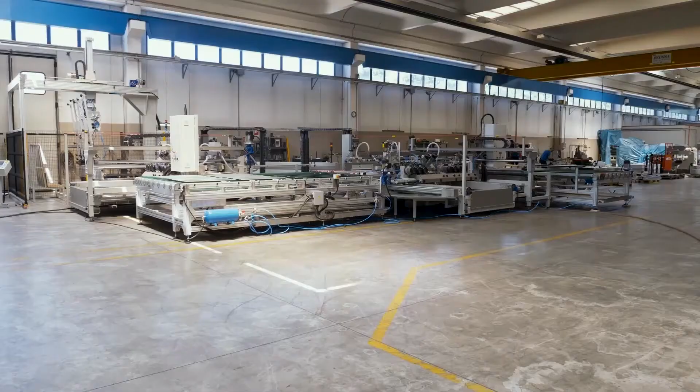Good morning and welcome to everyone. We are pleased to introduce our double edging machine line, model BFP35, for processing flat edge with arrises.

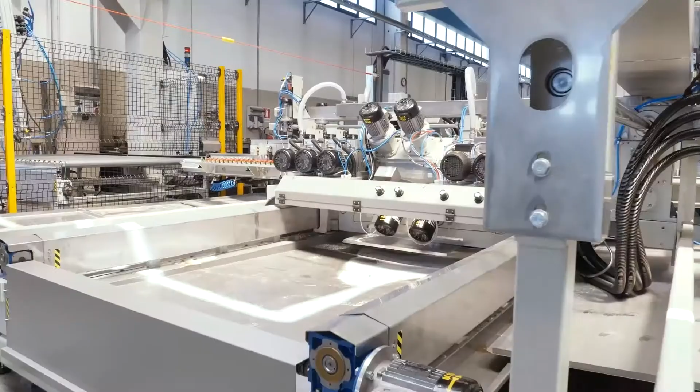It is composed of two double edging machines and two linking transfer tables. Every machine has 11 wheels per side between diamonds and polishing. The BFP35 model allows automatic processing of all four sides of the glass without operator intervention and ensures perfect squaring.

This line includes also an automatic glass loader which works together with the machines. Depending on the necessities, the line can be integrated with a drilling center and/or an automatic unloader.

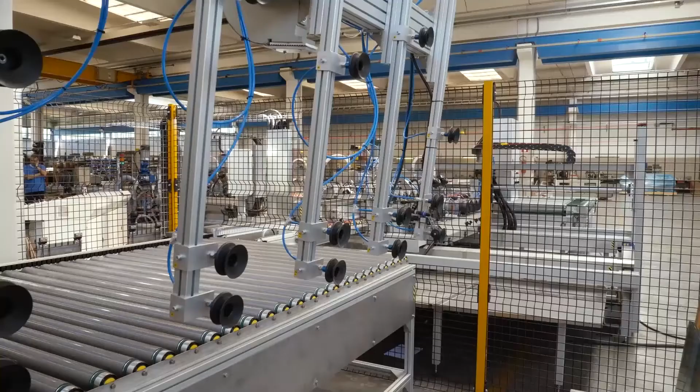A usual productive process starts with positioning the glasses into the loading area. The area near the loader is delimited by protection nets to safeguard the operator. The entrance is prohibited when the machine is working, so if the entrance door of the loader is opened while it is in operation, it is stopped immediately.

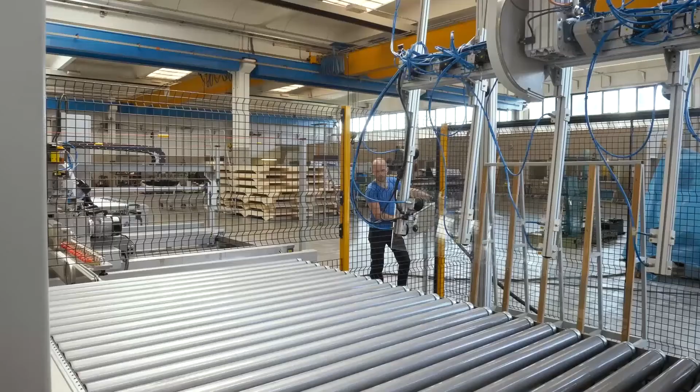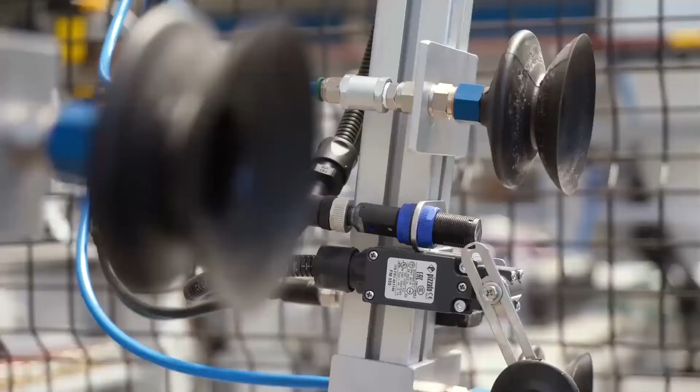Over the cup holder frame there is a scanner which reads the barcode on every glass sheet. The relevant data are taken from both the loader and the first machine. Based on the codes in the database, the loader sets itself automatically, activating only the necessary suckers and calculating the loading timing, while the first machine sets the whole line.

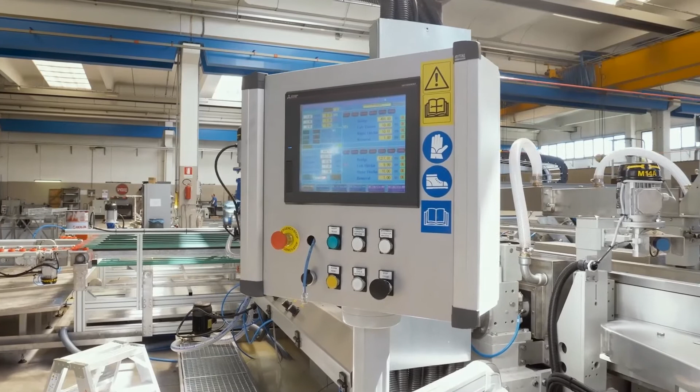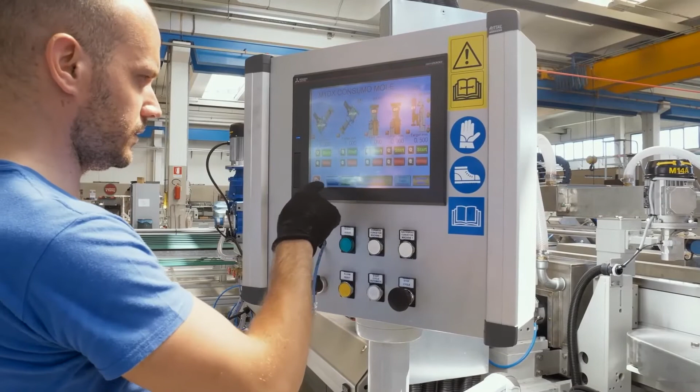The PC of the first machine works as control center for managing all the operations of the line. From the touchscreen it is possible to program and manage diamond wheel presets, even singularly, lubrication, control of the automatisms such as aligning, squaring, glass removal, polishing spindles, visualization of working data, and alarm management.

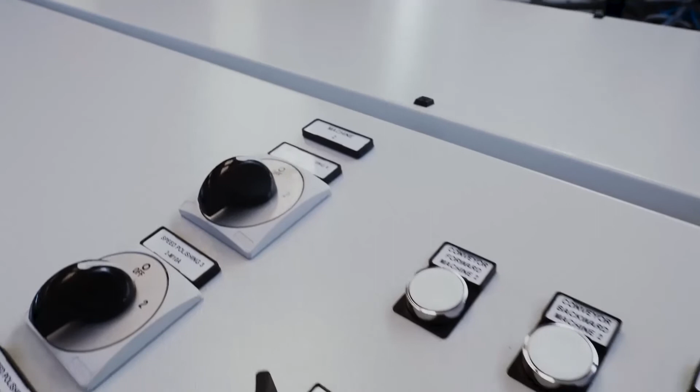The main electric box is self-standing and contains all the main electric and electronic components like the PLC, and a modem for internet connection which allows programming and maintaining the machine and other service inputs remotely. At every start, the machine automatically presets all the diamond wheels and lubricates them and the translation screws.

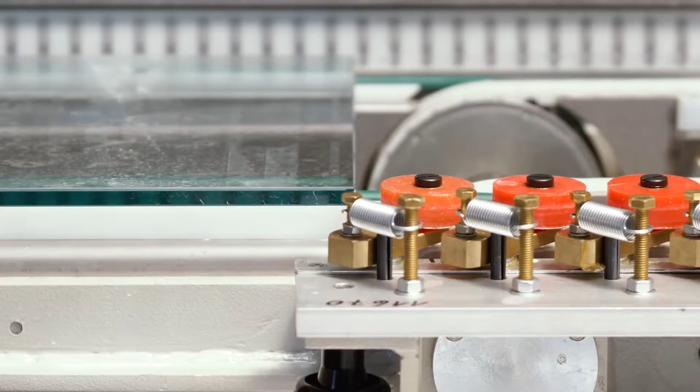When the glass arrives at the entrance of the machine, some mechanical readers take its position. The aligning group lines up the glass sheet to the fixed part of the machine, while the removal group sets the quantity of glass to remove for each side.

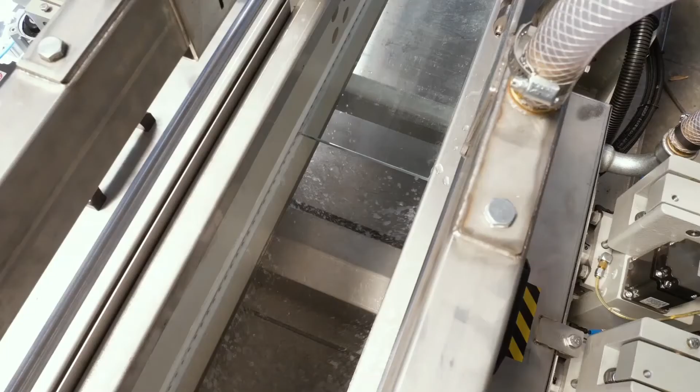The grinding and polishing process of the first two sides of the glass is made at a preset speed between 0.5 to 5.0 meters per minute. If the glass sheet is big, the central bar for supporting the glass automatically moves according to the glass size.

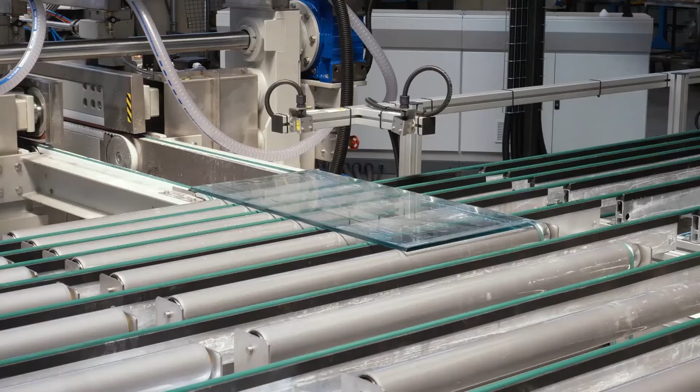At the exit of the first machine, the sheet is moved into the roller section of the transfer table. When it is completely over the transfer table, the roller section lowers. The sheet is laid on the belts and carried into the second machine for the grinding and polishing of the remaining two sides.

Before entering the second machine, the glass is stopped for aligning and squaring thanks to the automatisms. If the glass is big, an automatic system on the transfer raises the glass to facilitate the squaring.

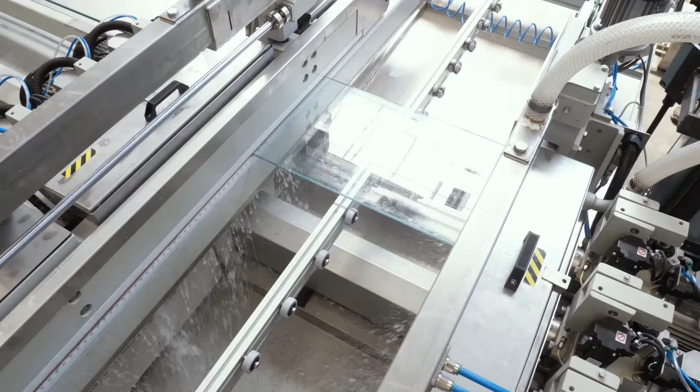Also in this case, the group that regulates glass removal determines the quantity of glass to be removed for each side. Then the remaining sides of the glass sheet are grinded and polished.

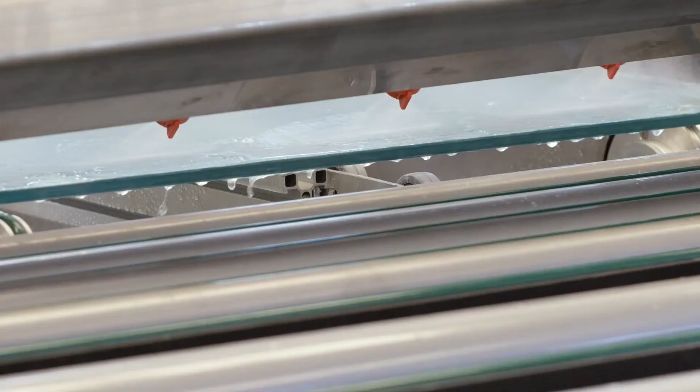The following phase of dabbing is optional. The sharp corners are dabbed 2x2 from this group. After the dabbing, at the outlet of the machine, the glass is automatically pre-washed and the excess water is blown away. After that, the glass is unloaded or goes through other processes.

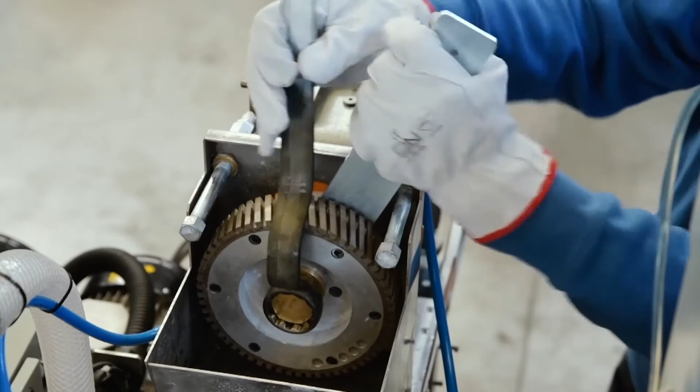The diamond oscillating spindle is an optional. It can fill the first position in the 2-diamond section of the BFP series. It is a spindle with a peripheral wheel that substantially facilitates high thickness grinding and laminated glass. Its oscillating movement helps to level the wheel's wearing.

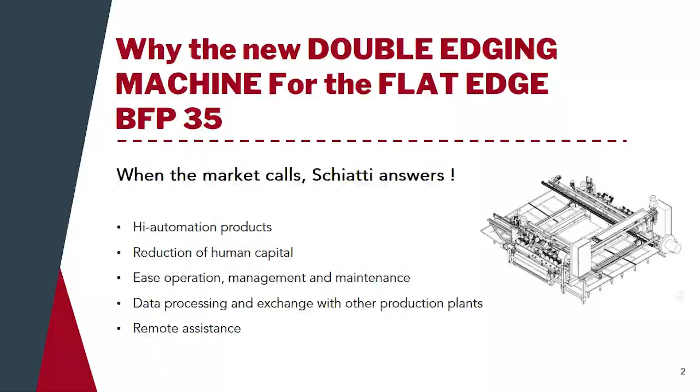The main characteristic of our double-edge machine BFP35 is, first of all, that it's made in Italy. This is a characteristic of all our products, and we kept it with this machine as well. Also important is ease of use and flexibility in production terms, and the ability to answer the needs of the customer.

The BFP35 is the new double-edge line, born from the combination of the Schiatti flat-edge double-edge lines with the modern technology of fully automatic spindles.

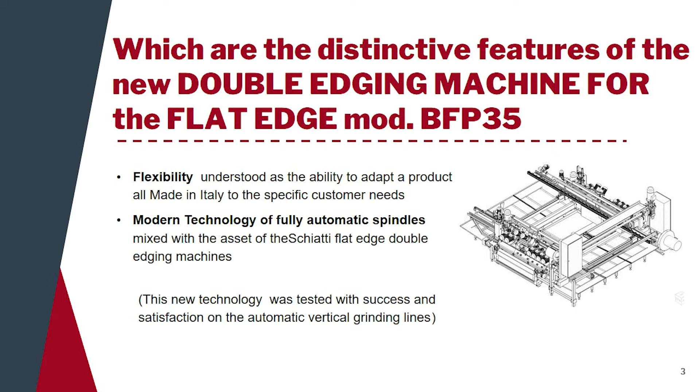This new technology has been tested with success and satisfaction on our vertical lines, called turnover lines, which are composed of 4 straight line edges and 3 turnovers.

But what does fully automatic diamond wheels mean? It means that the horizontal movement of the wheel, which in the past was carried out manually, is now powered by brushless motors. This kind of motor is not only very compact, but also has centesimal precision of movement.

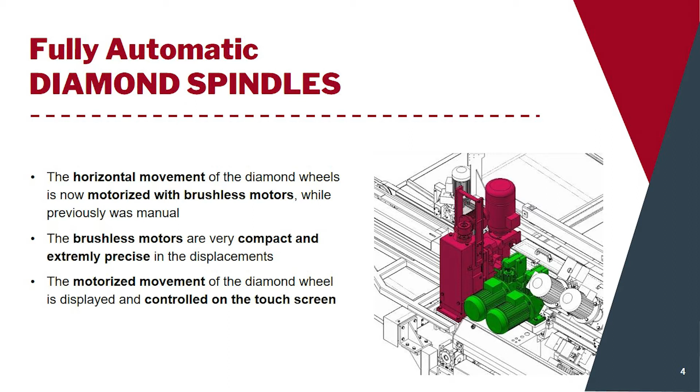At this point, the movement of the diamond wheel is smooth and precise, and it is also displayed and controlled by the touch screen. So the operator no longer needs to adjust each diamond spindle for the desired glass removal, because he can do everything comfortably from the operator panel touch screen, positioned close to the entrance of the line. An intuitive screen displays all the spindles of each bridge of the 2 machines of the line.

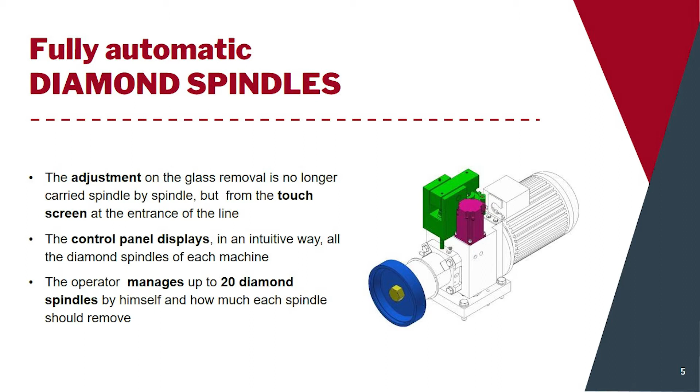The operator is thus able to manage up to 20 diamond spindles by himself and set each one to the quantity of glass to remove.

Everything we've described till now is certainly useful for quick use and setting of the desired glass removal on the plate, but there is something more.

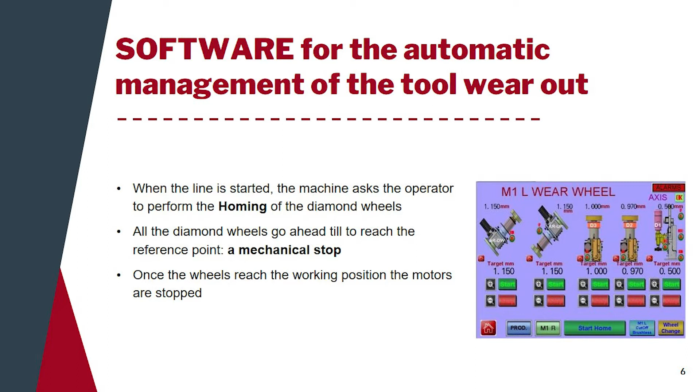Having motorized and controlled the spindle, we also decided to create software for the fully automatic management of tool wear. When the line is started, the machine asks the operator to perform the homing of the diamond wheels and to proceed with resetting the wheels.

When the operator presses the homing button, all the diamond wheels move until they reach a predetermined reference point, which is a mechanical stop. Once at their destination, the motor stops and informs the PLC.

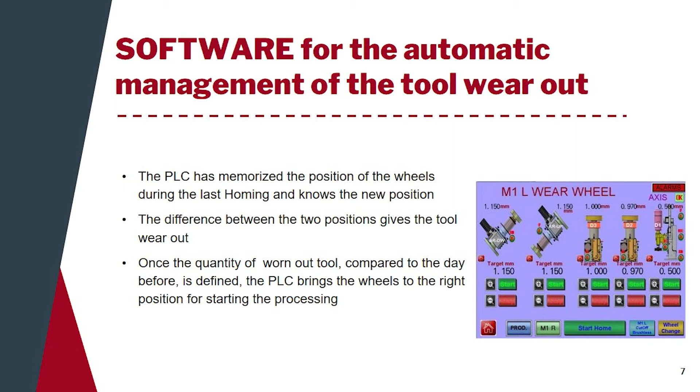The PLC compares the previous position of the wheel with the new one after resetting and calculates the quantity of worn-out tool. Once the quantity of worn-out tool from the original dimension of the wheel is defined, the PLC brings the wheel to the right position to start processing.

Thanks to this new technology, we have reduced machine setting time by the operator to zero, and above all, guaranteed uniformity of processing on the glass plate.

The automation of the line does not end here. In fact, we have implemented the software further, so that it is as flexible as possible, simple and intuitive for the operator.

First of all, the new program allows the operator to process not only glasses with the same dimensions, but also glasses that are different from each other.

Double edgers are commonly used for series production, but for some years, also due to the continued increase in precision of glass sheets required by end users, glaziers have been starting to use these lines also for processing glass of different sizes, with obvious waste of time and reduced production.

The new software allows optimization of the process for this glass, guaranteeing a good standard production, suggesting to the operator the best time to introduce the sheet, avoiding collision with the previous sheet, and guaranteeing, as far as possible, the saturation of the line for optimization of production of pieces of different sizes.

The operator can work in conditions of extreme safety, knowing that he can never fail to introduce the glass sheet correctly, because the PLC is controlling the timing of the loading.

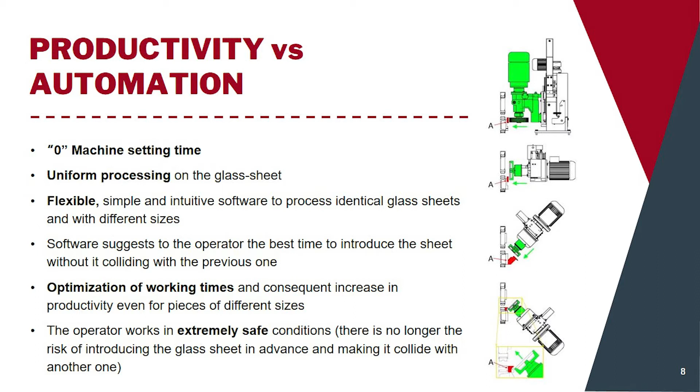The line can fit all the options that Schiatti offers. The barcode reader can be supplied both with a gun for manual reading, as we saw during the video contribution, or it can be applied on a loader arm.

This last application allows further automation of the production, with the operator just a spectator of a process he previously had to manage manually. How does it work? The reader is located on the rotating arm of the automated loader.

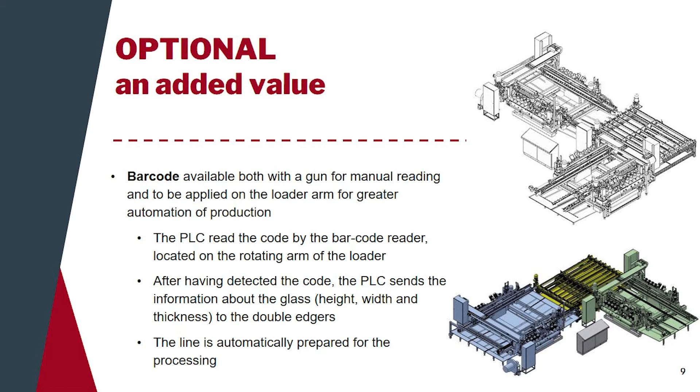While the arm is approaching the glass slowly, it reads the code and a green light starts flashing. This means the PLC has received all the information, such as glass thickness, width, and length, and is preparing the line to accept those glasses. Once the loader has laid the glass on the roller frame, it waits until it receives a signal of line ready to work from the PLC, then releases the glass for automatic processing.

Other interesting options which can complete the line are automatic glass unloader, edge grooving spindle, and hogging wheels. This last kind of wheel is useful above all when there is a big removal of glass on thick or laminated glass. The hogging spindle mounts a very aggressive diamond wheel, which, oscillating from bottom to top, wears out uniformly over its entire thickness, increasing its lasting life. The peculiarity of this wheel is its great cutting capacity.

It is therefore very useful on high thicknesses, where the cut of the glass sheet is never optimal. In this way, it can remove large quantities of material without reducing the feed speed, requiring little use of the other diamond wheels.

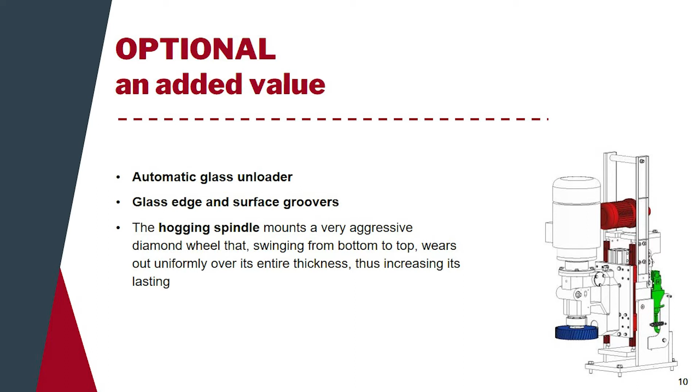I see some questions came during this program. The first one is: can the same automation concept that you have installed be applied on smaller machines? Yes, this system can be applied on smaller machines. It can be applied on double edger machines, like in this case, but also on a vertical straight edging machine. So it is possible.

Second question: what are the dimensions in case of small spaces? First of all, we can make a customized machine according to the space you have available. But considering that this system can be applied on any kind of machine, on most of the machines we manufacture, I can say that you can put it on from the small edger to the big edger. So for sure, within our range, we will find the right machine for you.

Can I upgrade an existing machine? Yes, an existing machine can be upgraded to this system. The issue is that anyway we should change the spindles, because the type of spindles is different from the standard one, and we should also change the electric plant and the PLC. So at the end, the cost will probably rise too much, so it's better to buy a machine already with this system.